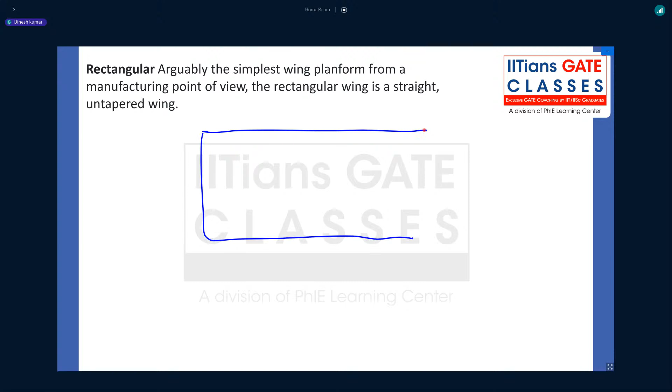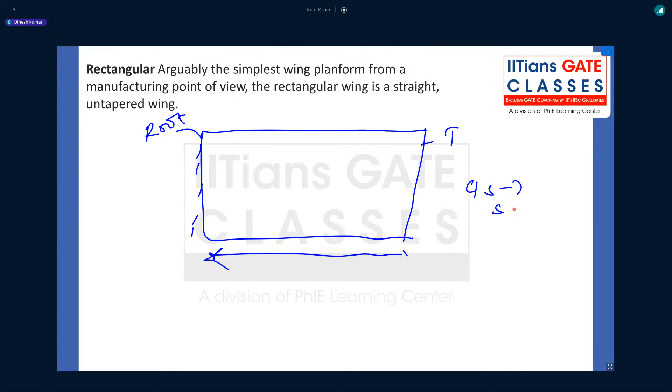We all know the rectangular wing planform is like this. Suppose this is the root and this is the tip. Throughout the wing, the cross section remains the same in the span-wise direction. So your rib cross section will not depend on the position of the rib. So this option is correct: for a rectangular planform wing, the dimensions of the rib do not depend on their span-wise position.

Now option B: ribs increase the column buckling stress of longitudinal stiffeners connected to them. Yes, by redistributing stresses at discontinuities. Ribs always increase the buckling strength of longitudinal members like stringers or spars. That was a previous year question too.

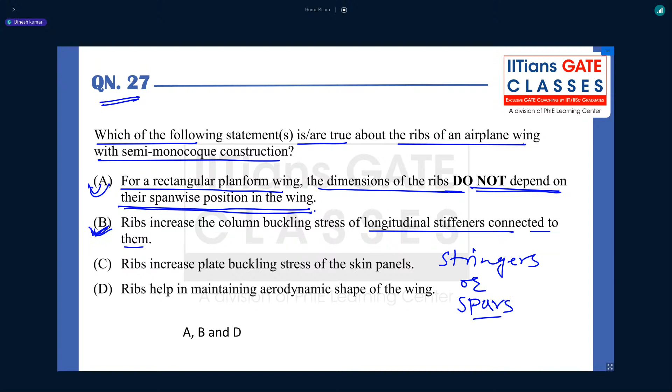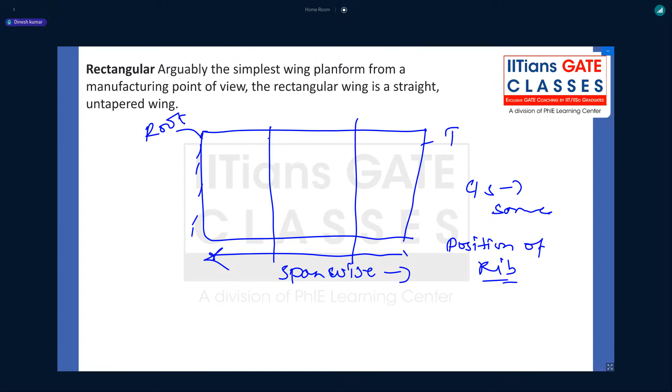Now option C: ribs increase the plate buckling stress of the skin panel. This seems to be wrong. Why? In the rectangular wing planform, suppose one rib is here and another is here. It is dividing our skin panel into multiple small plates, which will increase the buckling strength. So the buckling stresses will go down. So C is not the correct answer.

Let's read this option the other way around. Ribs increase the plate buckling stress of the skin panels. Buckling stress means allowable or applied? Here is a bit of confusion for me, because it's the language. Anything you want to suggest, guys, on this?

Basically, it is saying it is increasing the buckling stress, that means it is increasing the critical stress. So indirectly your critical load is high, meaning your allowable is high. So I believe C is also a correct answer; your allowable critical stress will increase. And option D, the rib of course maintains the aerodynamic shape of the wing. So your correct options are A, B, C, and D.

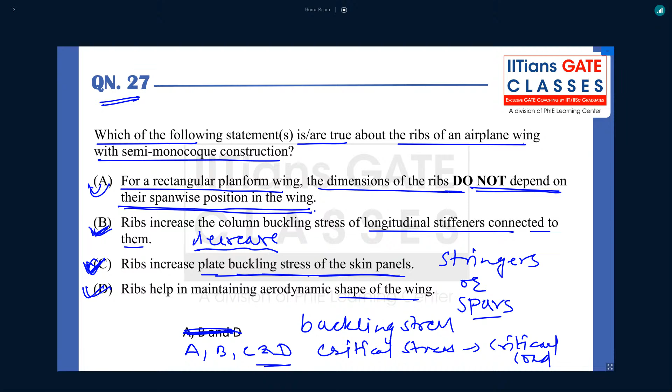Okay, any doubt? So let's move to the next question.

This question says: the shear flow distribution in a single cell thin-walled beam under the action of an arbitrary shear load SY applied at the shear center is shown in the figure. The cell has horizontal symmetry with booms marked 1 to 4 that can carry direct stresses. The shear modulus G is the same for all the walls, and the area of the cell is 1,35,000 mm square. With respect to the point O marked in the figure, the distance to the shear center S is?

So guys, if you see this question, they ask the shear center position from point O. Now guys, usually whenever we have done shear center problems from a GATE perspective, generally we do it for open sections. And in that case, for open section, what do we first do, Mr. Thangamatu? First we find shear flows. Because in closed section, finding shear flow takes a lot of time.

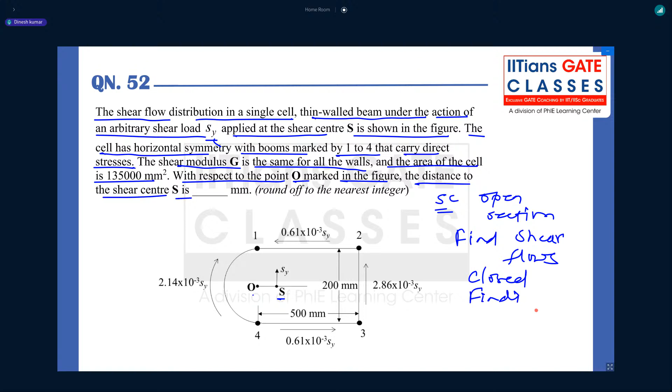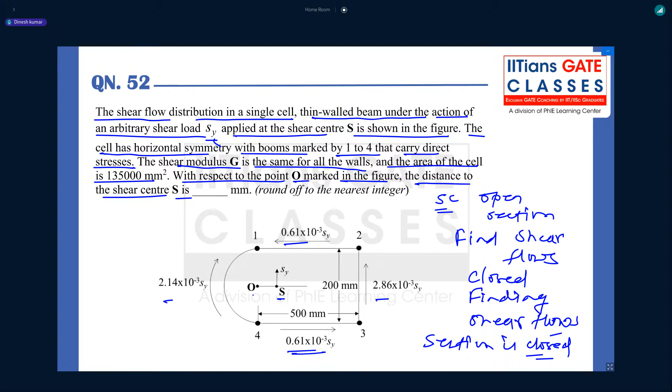But in the given question, what is it? The section is a closed section. And guys, they have also given the shear flows. You can see guys, the shear flows are given. So that means we know what the shear center is, guys. We know the shear center for any section.

Let's see, suppose this channel section, and for the channel section, suppose I am considering my shear center is here and this shear force Sy is applied. Now, if you want to find the shear center position from this web, we consider this distance, some distance E. So what is our procedure? We do moment equivalence when we find the shear center position. So we write Sy into E. Suppose we are doing it about this point.

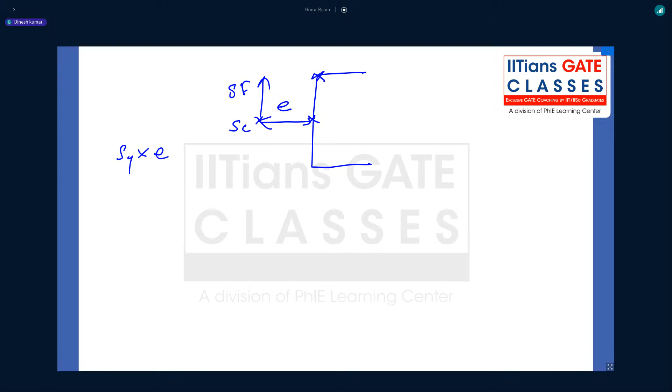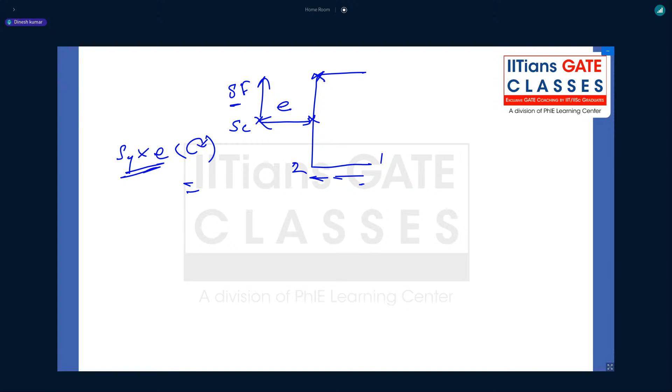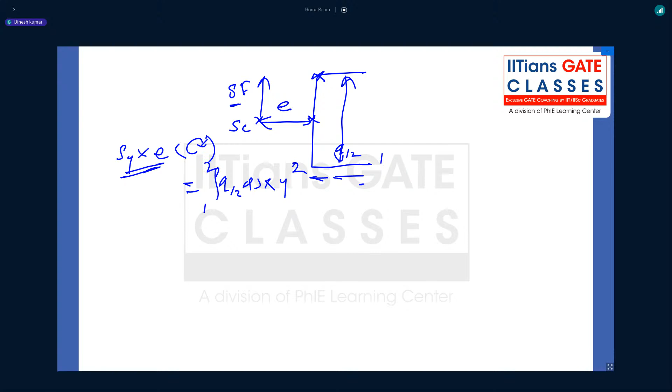Whatever shear flow is flowing in this 1 to 2. So this moment equivalence means what? This shear force about this point is going in the clockwise direction, and this shear flow about this point will be equal, because this will also go in the clockwise direction. So suppose here my shear flow is Q1 to 2. So usually what we do, Q1 to 2 into ds, then we multiply with this distance y, and then we integrate from 1 to 2. This is what we do in moment equivalence. So the same thing we have to do here, guys.

If you look at the question, it's a very straightforward question. Due to Sy, I will do moment equivalence about point O. And another good thing, this section is symmetric. They have mentioned it is symmetric. Now there is some additional information, like this area is given. Basically, it is not required, guys. You can solve without this area, without the G value.

How? When I do moment equivalence about point O, this Sy into Os is the moment. And guys, is this clockwise or anti-clockwise? It is anti-clockwise. So I have to equate anti-clockwise moment to anti-clockwise moment, because I am doing moment equivalence. Now guys, first I will take 4 to 3. The shear flow is going in this direction, and about this point O, this will give me an anti-clockwise moment.

So this is 0.61 into 10 to the power minus 3 Sy. What is the length? It is 500. And the moment arm is 100. Now guys, this 3 to 2 is again going up. And if you take moment about this point O, it will again give anti-clockwise. So it will be added. So it is 2.86 into 10 to the power minus 3 Sy, the length is 200, and the moment arm is 500 here.

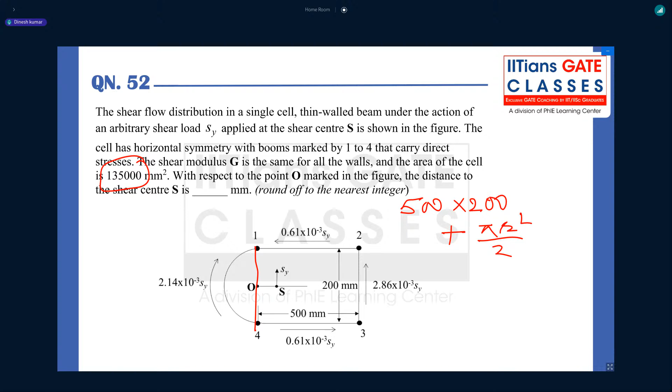115,708. Okay, so that means what we have to do guys in this case is like this: if you take a small section of length ds, so this ds into this rho will be the moment, and then multiply and divide. Okay, so that we have to do.

So it will be dA, that means d into rho dA, then it will be simply 2.14 into 10 to the power minus 3 SY, and then now A. So what will be the area A? Area A will be, when it is integrated, this will be area ds, so multiply and divide by 2.

So it will be 2 here, and then in the area, so into 2. So the area will be 135,000 minus, um, it is 500 into 100. No, 500 into 200, so let me check. 500 into 100.

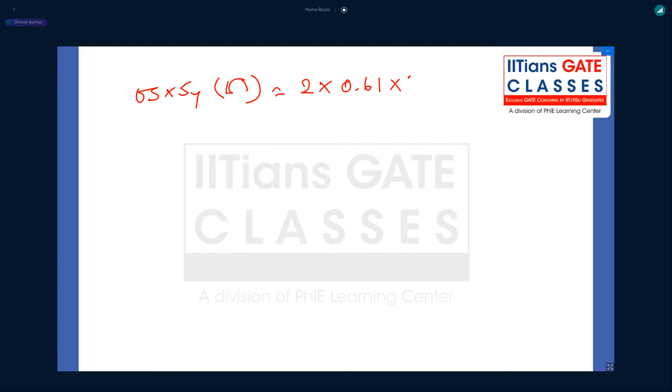Now guys, this will be equal to, I can write now directly 2 into 0.61 into 10 into 10 to the power minus 3 SY into 500 into 100, plus it is 2.86 into 10 to the power minus 3 SY into 200 into 500.

Okay, then plus, now the question comes guys. Now, semicircular, not semicircular, for this curved part. So for curved part, how we will find?

So guys, when we consider this small ds, okay, which is at some distance, suppose rho, okay. So guys, this ds, you can see this is making a triangle. So this ds into rho, and this is shear flow, right? So this ds into rho, if you multiply and divide by 2...

Multiply and divide by 2, let me check when I did. I multiplied, so when you multiply and divide by 2, what will happen? You can see here, this will be small area dA, integration 2 into shear flow.

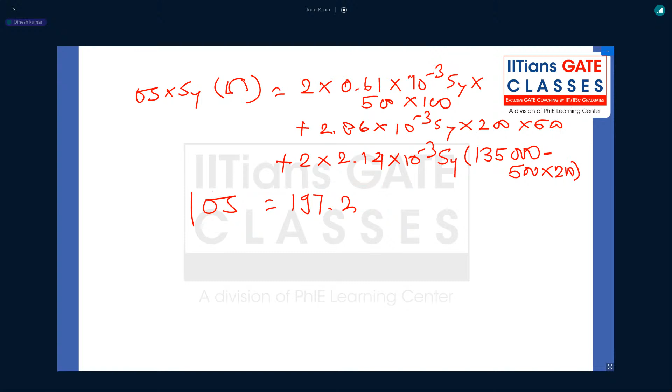What we find is force, my force df. Df is always the shear flow into ds. You guys will be knowing this from Bredt-Batho theory, we do that derivation. So df is your shear flow into ds.

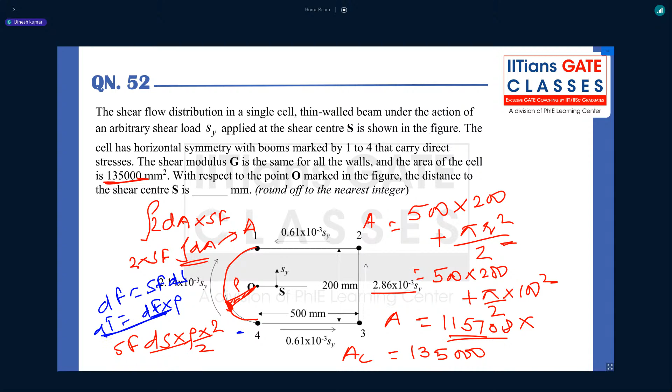Okay, and then we find moment dt. So dt is df into rho. Then we multiply and divide by 2. That approach we have to use, and the answer will be coming for this question. Answer is coming as 197.2. Guys, if you can do the calculation, tell me.

Yes, Tangamoto, are you there? Anybody can do this calculation? Guys, in exam it needs to get... when I did it the first time, I also didn't cross check these areas.

Anyone have any comment, guys? It was a 2-mark question, it was an easy question, but we need to take care of a few things while solving this question. There are only two questions from thin walled structure. For the first question, all 4 options are correct, and for this one the answer is 197 point something. Those watching on YouTube, tell me if any doubt or concern.

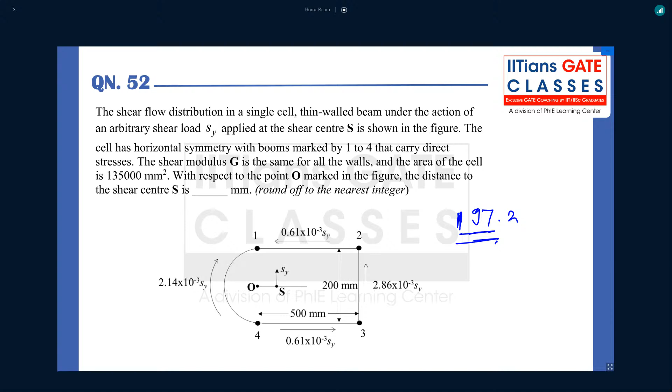Okay, so guys, that's thin walled structure.

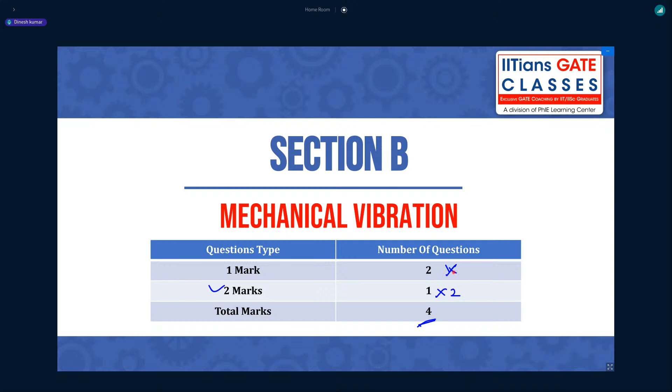Now mechanical vibration. So guys, mechanical vibration was also quite simple in this gate paper. They asked 2 questions as usual for 1 mark, and 1 question for 2 marks. For 2 marks there was 1 question, so the total is 2 plus 2, like 1 into 2 and 2 into 1.

Now guys, read the first question, what it says. This question number 25 is MSQ, and if you read this question, I think some of you or most of you can answer it. Read the question: which of the following statements is or are true about harmonically excited forced vibration of a single degree of freedom linear spring mass damper system?

So guys, it is like that. There is a spring mass system with damper, and it is excited with some force, a harmonic force, like let's take F naught sine omega t. So it's a case of harmonic forced vibration.

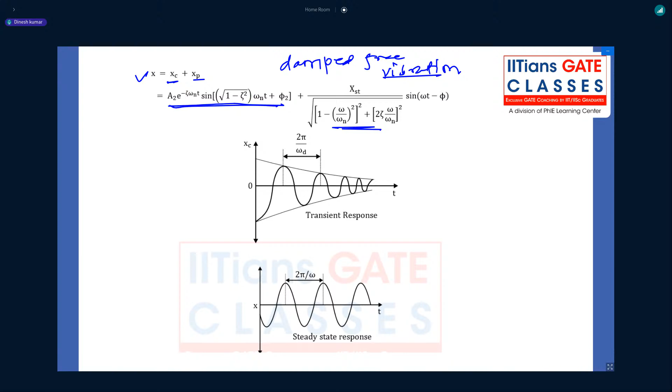Now for harmonic forced vibration, the solution is given by complementary function plus particular integral. The complementary function is like from your damped free vibration, and the particular integral gives me the steady state solution. So the solution from the free damped part is known as the transient response, and the solution from the particular integral is known as the steady state response.

Now this steady state response doesn't depend on initial conditions. But your free damped vibration solution will depend on initial conditions. Also guys, whatever solution I have given, it is for under damped vibration under force excitation.

Now guys, look at the options. It says: the total response of the mass is a combination of free vibration, transient and steady state response. Yes, that is already what I have shown you. That's correct.

Now, the free vibration transient dies out with time for each of the 3 possible conditions of damping: under damped, critically damped, and over damped. So guys, we know for under damped vibration, theoretically it takes infinite time. Theoretically the system never comes to rest. So that means this statement is wrong.

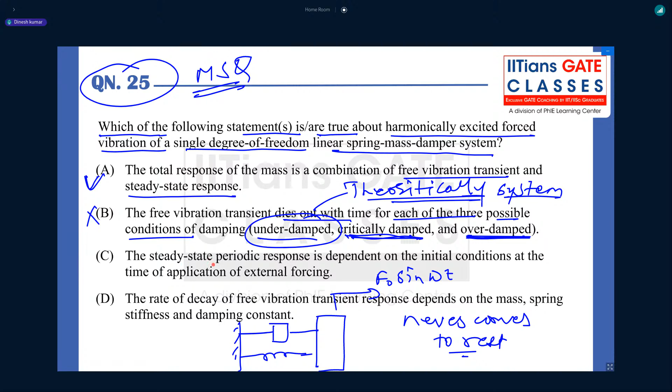Read option C: the steady state periodic response is dependent on initial condition, which is wrong. Only your transient response depends on initial condition, which is what at time t equal to 0, what is your displacement and velocity. So C is not correct. Now read D.

The rate of decay of free vibration transient response depends on the mass, spring stiffness, and damping coefficient. Rate of decay usually comes into picture for under damped vibration, and we know rate of decay delta is almost equal to 2 pi zeta. Now zeta is C by Cc, and Cc is 2 under root Km. So that means the logarithmic decay depends on C value, K value, M value.

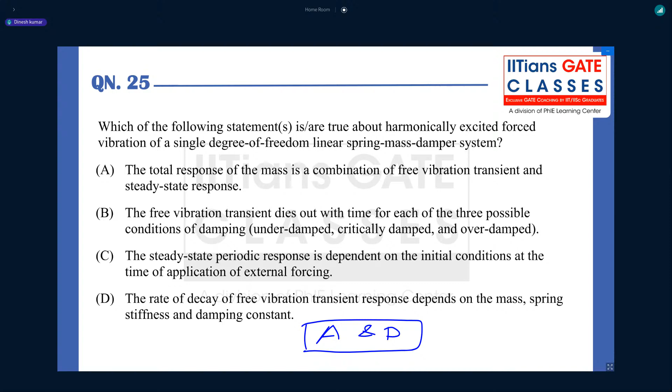So what is given? Mass, spring stiffness, and damping constant are given, so D is correct. So the final answer for this MSQ is A and D. Any doubt, any concern on this? It was a good and simple question. If you know the concepts well, you can answer this question.

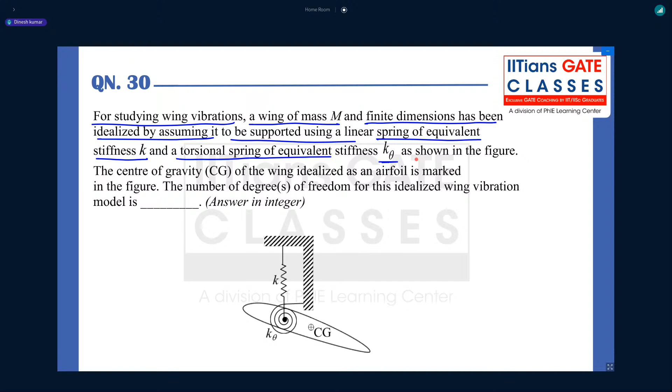Let's move to the next question. For studying wing vibration, a wing of mass m and finite dimension has been idealized by assuming it to be supported using a linear spring of equivalent stiffness K and a torsional spring of equivalent stiffness K theta as shown in the figure. The center of gravity CG of the wing, idealized as an airfoil, is marked in the figure. The number of degrees of freedom for this idealized wing vibration model is asked.

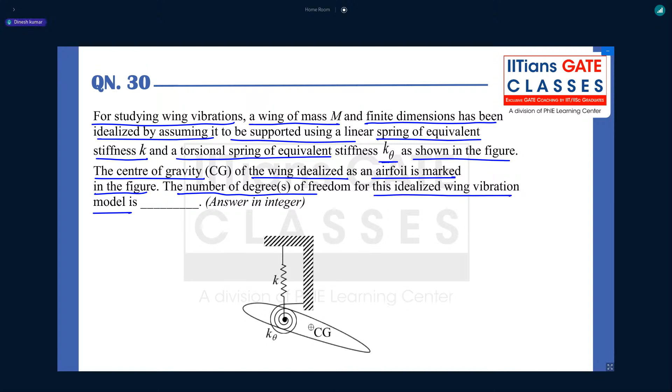So basically, if you see this and CG is here, how can it vibrate? What is the degrees of freedom, the number of independent coordinates required to define motion? This can vibrate in the translational direction, meaning it can go up and down, so suppose that displacement is X. Now this wing aerofoil can also vibrate about this point in rotational vibration, so suppose this is theta.

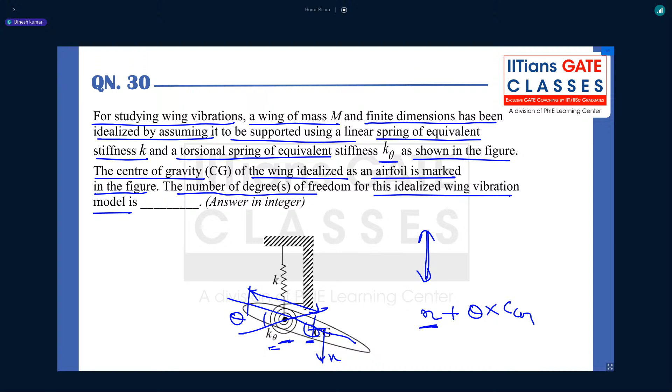Now if you find the final displacement of this CG, what will it be? It will be X plus, suppose this distance is known, CG distance, so it will be theta into that distance. So you need two different coordinates to define the complete motion of this aerofoil or wing section, where x is translational and theta is rotational. So the degrees of freedom here are 2.

Now such questions are there in Grover, and in SS Rao as well. But here they just ask degrees of freedom, they didn't ask for the final solution. But in those standard textbooks, they even ask to find modes and all for such questions. So 2 is the answer, guys.

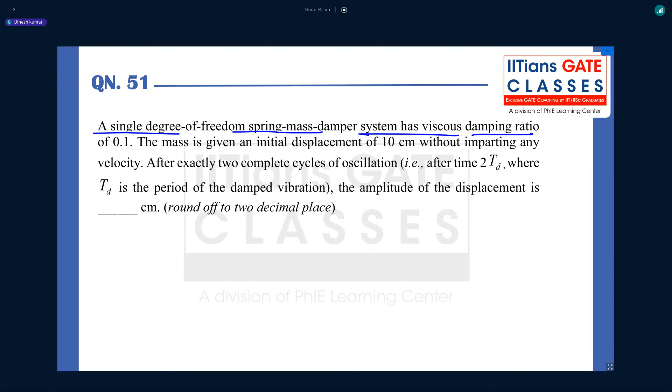Now let's move to the last question from vibration, a very simple, repetitive question. A single degree of freedom spring mass damper system has viscous damping ratio 0.1. The mass is given an initial displacement of 10 centimeter without imparting any velocity, so at t equal to 0, velocity is 0, and x equal to x naught, which is given as 10. After exactly two complete cycles of oscillation, where TD is the period of damped vibration, they ask the amplitude of the displacement.

So the number of cycles here is two. For two cycles, how many amplitudes do you require? You require three amplitudes: x naught, x1 and x2. So what is asked is, at the completion of two cycles, the amplitude x2 is unknown. Now we know delta is 1 by n ln of x naught by xn, so here it is 1 by 2 ln of x naught by x2.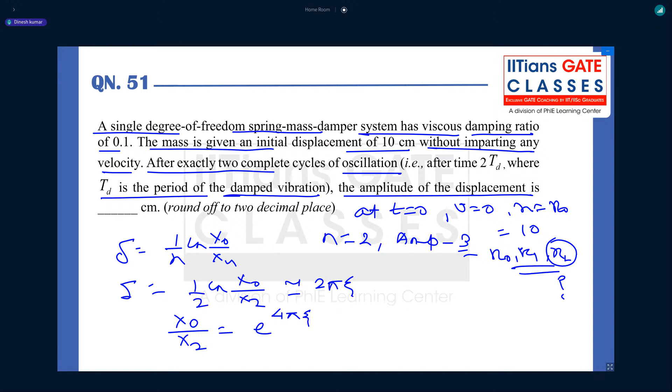And we know delta is approximately 2 pi zeta. So from here, if you find x naught by x2, it will be e power 4 pi zeta. In this question, x2 is asked, which is x naught upon e power 4 pi zeta. Substituting everything, it is 10 upon e power 0.4 pi, because zeta is given as 0.1. Solving this, I get my x2 value as 2.84.

Let me check the answer.

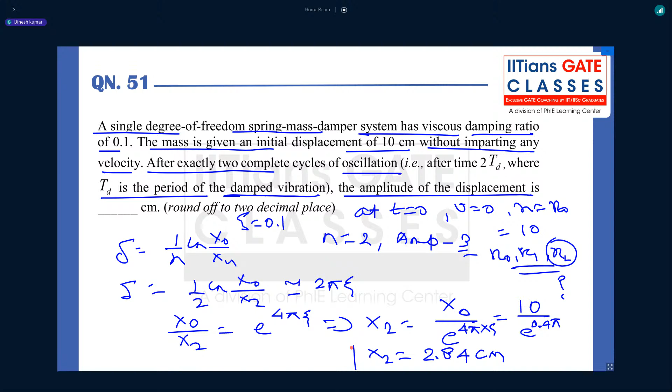Question number 51. So it is 2.84 centimeter. Okay. Now, guys, how I decided this amplitude, that also we can see. So they are telling two complete cycles, right? So you guys can see.

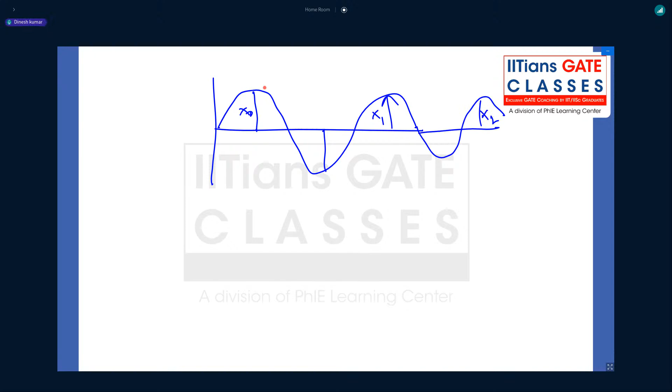So that is suppose x naught. So this will be two successive amplitudes, right? So this will be x1, and then this will be x2. So this is one cycle, and this is complete one cycle. Okay.

So guys, that's all from vibration questions. So there were only three vibration questions and two questions from thin-walled.

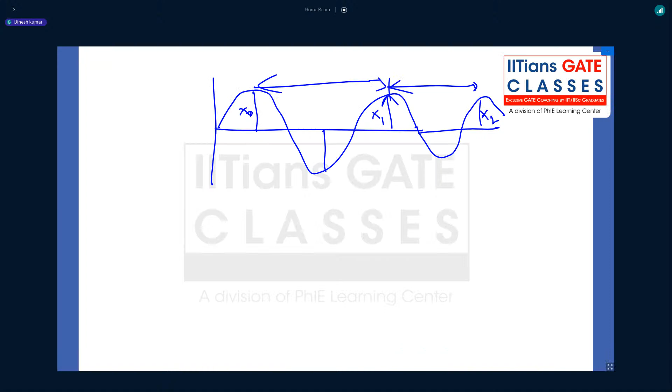Okay. So what I take from this session, I feel the shear center question was easy, but here we need to be careful specifically about the area part. You cannot just assume a semicircle and do the calculation. In the first attempt I also did. Many of you might have done it in the GATE exam, and that will be a mistake.

But actually we need to take the area properly, and you can say it's a question combining Bredt-Batho theory plus the shear center finding approach in terms of the concept. So the answer is 197.2 mm. So that's all from my side.